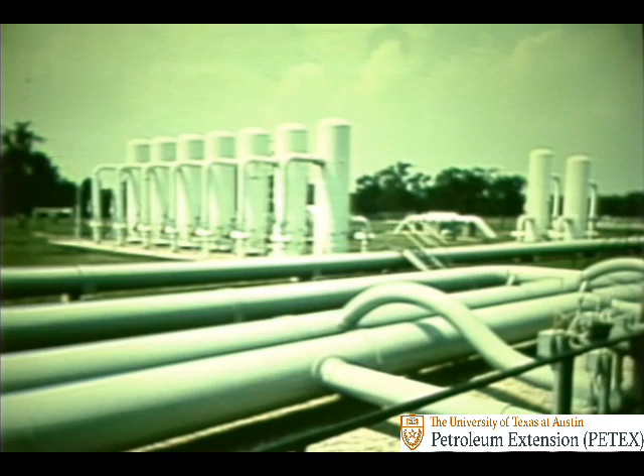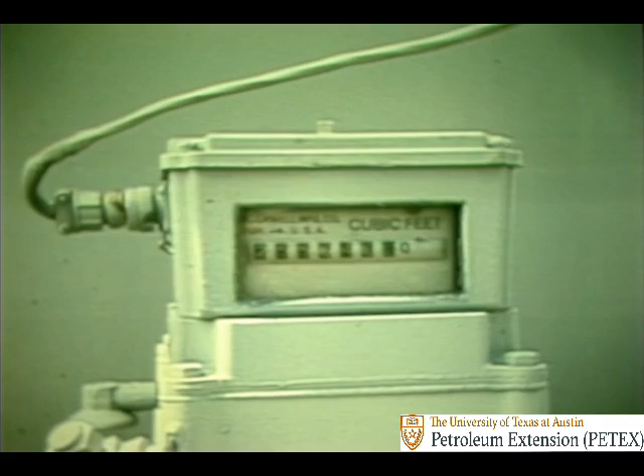Most gas meters record the volume of natural gas in cubic feet. But here another complication appears, because a cubic foot of gas may not always equal another cubic foot of gas. The real value of natural gas depends on the number of gas molecules contained in 1 cubic foot.

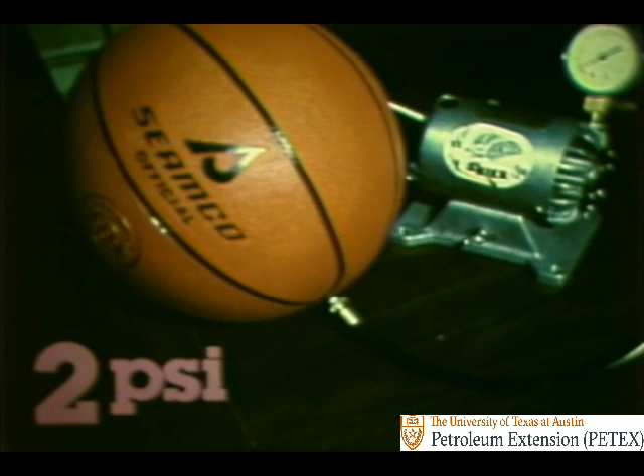Let's look at this principle in a slightly different situation. This basketball contains air at a pressure of 2 pounds per square inch. If we increase the pressure to 8 pounds per square inch by adding more air, we have squeezed more gas into the same space. We haven't increased the size of the ball, only the pressure, and thus the amount of gas it contains. So remember, the amount of gas in a confined space will vary with the pressure of that gas.

A gas meter measures only the number of cubic feet of gas that pass through it. The actual number of gas molecules will depend on the temperature and the pressure of the gas. Remember, the amount of gas in a confined space will vary with the temperature and pressure of the gas.

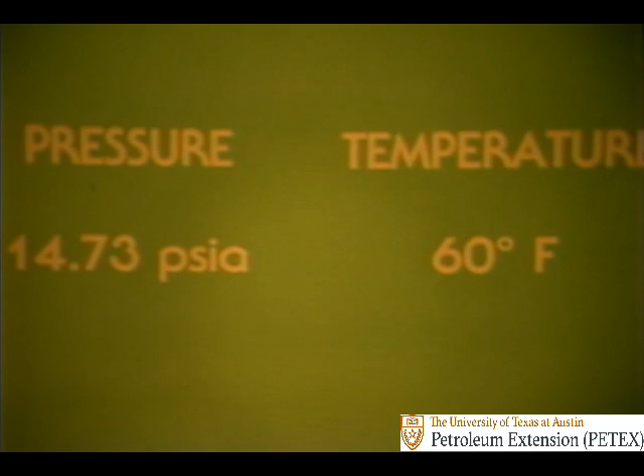Since gas temperatures and pressures do vary, most measurements are converted to a standard. In the United States, standard pressure is usually 14.73 psia, and standard temperature is 60 degrees Fahrenheit. All this may seem confusing now, but don't worry, you will receive additional training later. For now, just remember that to measure natural gas accurately, you need to know its flow rate in cubic feet, its temperature, and its pressure.

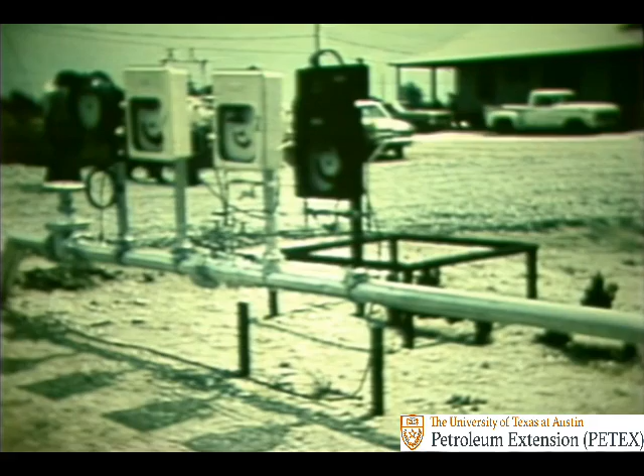Now, what does all this have to do with turbine meters? Well, a gas meter will measure the gas flow, or the amount of gas that passes through it. In addition, turbine meters use equipment to make temperature and pressure measurement automatically. This meter provides a readout in cubic feet of the amount of gas that has passed through it.

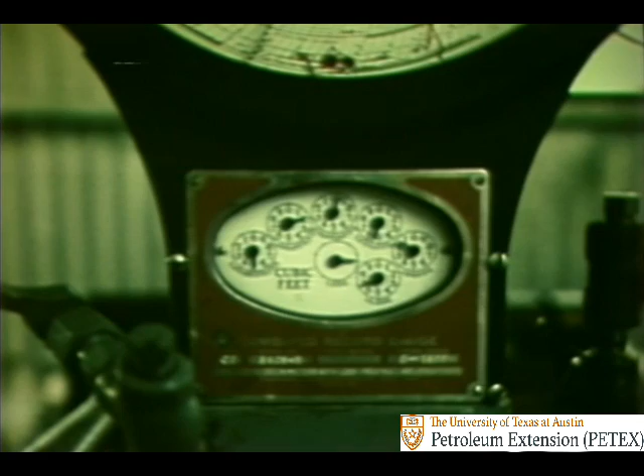Now, this example registers the amount of gas in cubic feet on a circular chart covering a 7-day period. The chart will provide a record of the amount of gas flowing through the meter for any specific time during the week.

A more sophisticated device measures the gas flow, time, pressure, and temperature all at one time. These figures can then be converted to a temperature and pressure standard.

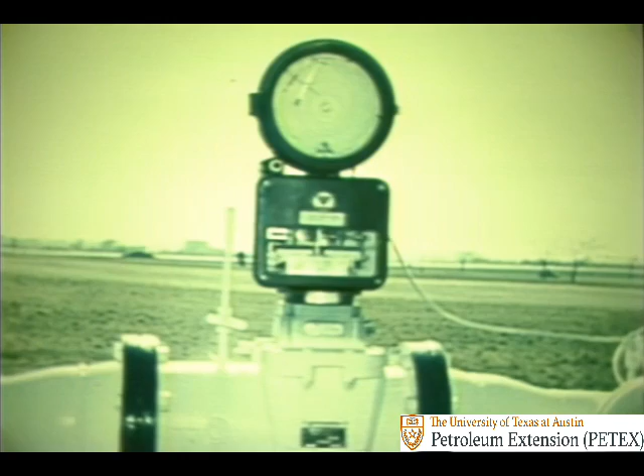The measurements from a meter in a remote location can be transmitted to a computer, which can do all the necessary calculations. And this computer can keep track of a number of meters at the same time.

As you can see, many types of meters are available to handle different situations. But no matter what type of meter is used, it is measuring a valuable product and must be inspected and maintained to ensure accuracy.

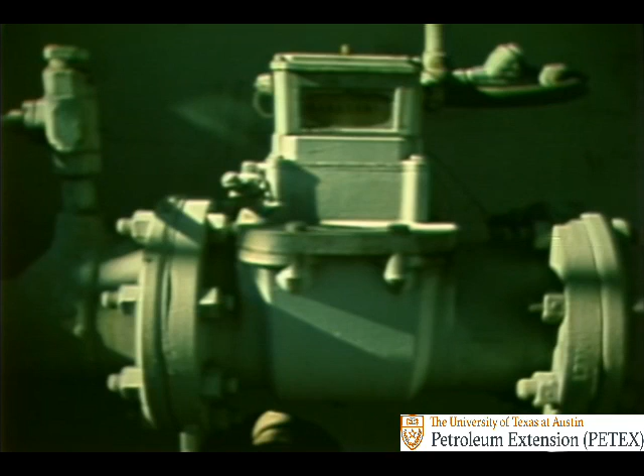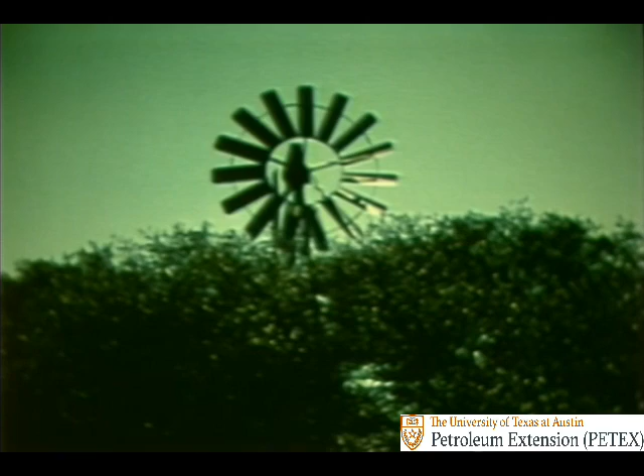Now let's turn our attention to how a turbine meter operates. Since it is a velocity type meter, it works somewhat like a windmill. A windmill consists of a number of blades on a rotor that turns as wind passes over the blades. The rotor turns faster as the wind increases in velocity. In fact, the rotor's speed will increase in direct proportion to the flow of air over the blades.

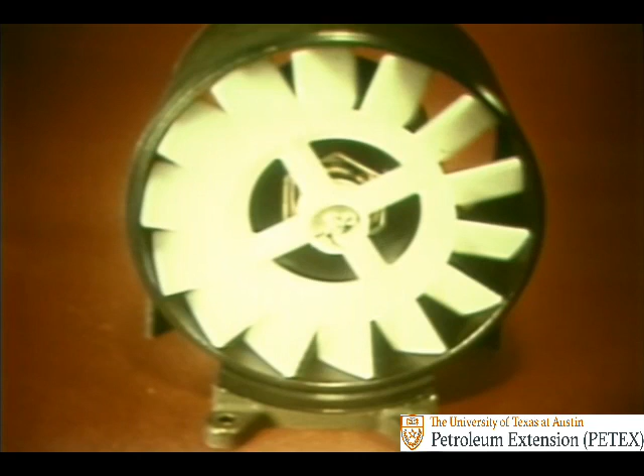Likewise, the rotor on a turbine meter has blades and turns in direct proportion to the force of the gas flowing over the blades. The faster the gas flow, the faster the rotor will turn.

If we increase the flow rate, more gas will move through the line, and the rotor will turn faster. If the flow rate slows down, the rotor will also slow down.

All gas meters are designed to work within a specific range. This is defined as the range of gas flow under constant pressure at which the meter will operate at a plus or minus 1% accuracy.

Say a meter has a range of 5 to 20 cubic feet per hour, or a 4-to-1 range. This means that any gas flow between 5 and 20 cubic feet per hour will be measured with the required plus or minus 1% accuracy.

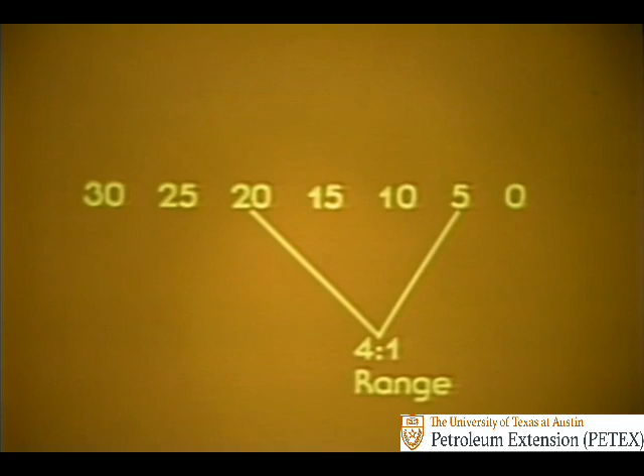If the flow rate is outside of the meter's range, it may not measure within the desired degree of accuracy. This is especially true at low flow rates.

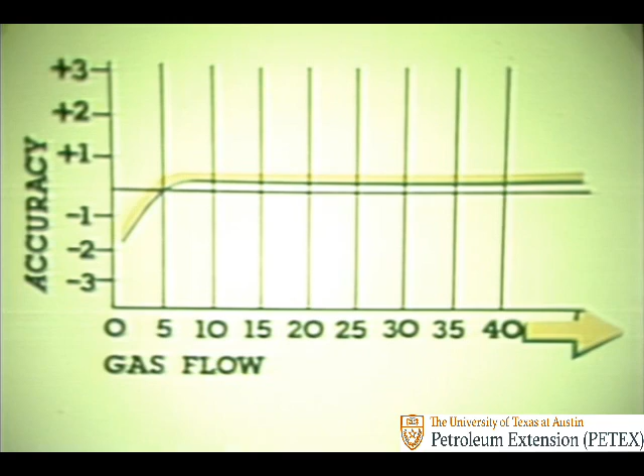If the gas flow is above the meter's range, the meter is operating over range. Not only could inaccurate measurements result, but the rotor bearings could be seriously damaged. If you suspect that the meter has operated over range, it should be given a thorough inspection.

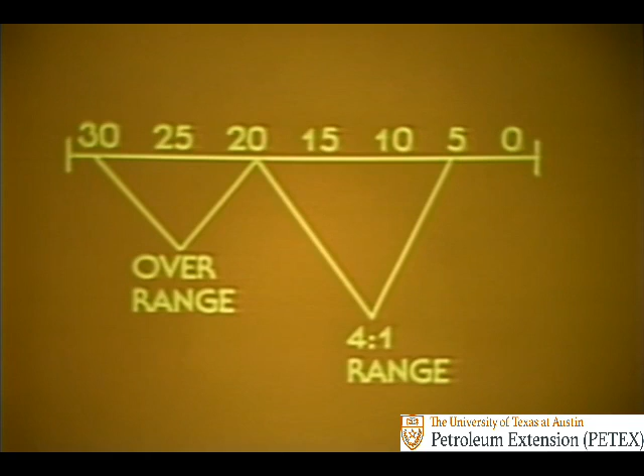One unique characteristic of a turbine meter is that its range will increase as the pressure of the gas flow increases.

Let's return to the revolving door model. As the gas flows through the meter, it turns the rotor, which registers on the recording device. If the pressure of the gas increases, more molecules are squeezed into the same space. Therefore, more molecules pass through the meter for each turn of the rotor. In effect, the meter is measuring a greater amount of gas, so its range has been increased.

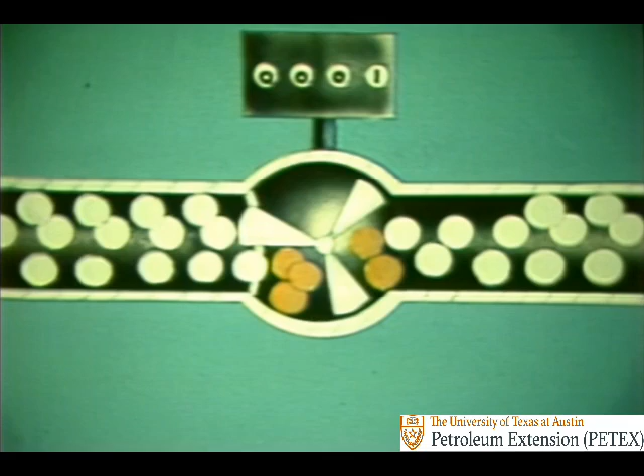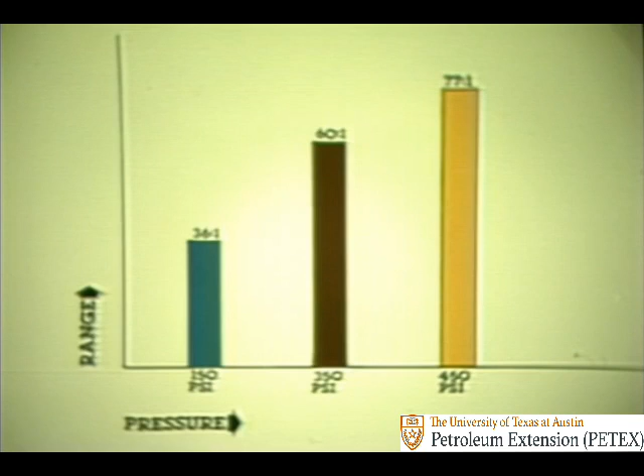The blue bar shows that the gas is at a pressure of 150 psi, and the meter's range is 36 to 1. In this situation, the meter will measure at plus or minus 1% accuracy any flow from over 233,000 cubic feet per hour down to about 6,000 cubic feet per hour.

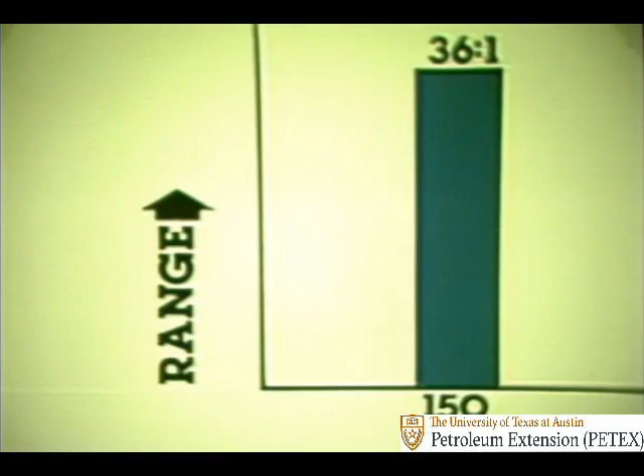If the company needed to send more gas, they could increase the pressure by squeezing more gas into the pipeline. Of course, any increase in the flowing pressure will also increase the flow rate of the gas.

Now, say the pressure is increased to 350 psi. A turbine meter would still measure accurately because its range would automatically increase to 60 to 1.

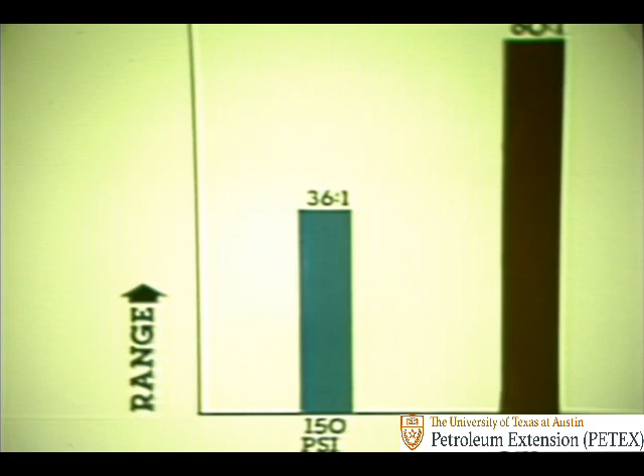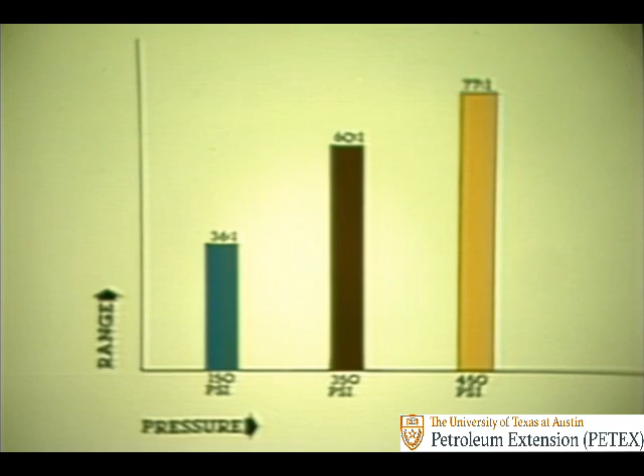Now, even if the pressure increases to 450 psi, the meter's range will increase to 77 to 1, and it would be able to measure flows of over 1 million cubic feet per hour. An orifice meter would require a number of different plates to cover this pressure range.

Before moving on to the parts of a turbine meter and how they work, let's review what we have covered so far. First, gas must be contained somehow, or it will dissipate into the atmosphere.

Second, the number of gas molecules in a cubic foot will vary with the pressure of the gas. If the gas is at a high pressure, more molecules will be squeezed into the area.

Also, as the temperature of the gas changes, it will affect the number of molecules. Gas at a low temperature will have more molecules per cubic foot than gas at a higher temperature.

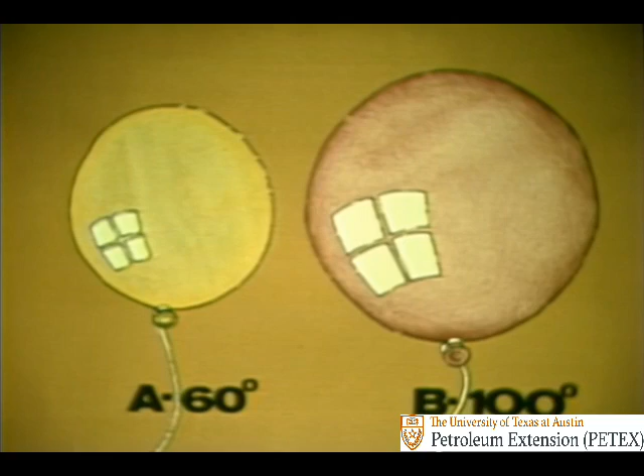Fourth, the turbine rotor will spin in direct proportion to the force of the gas flow. The faster the flow, the faster the rotor will spin.

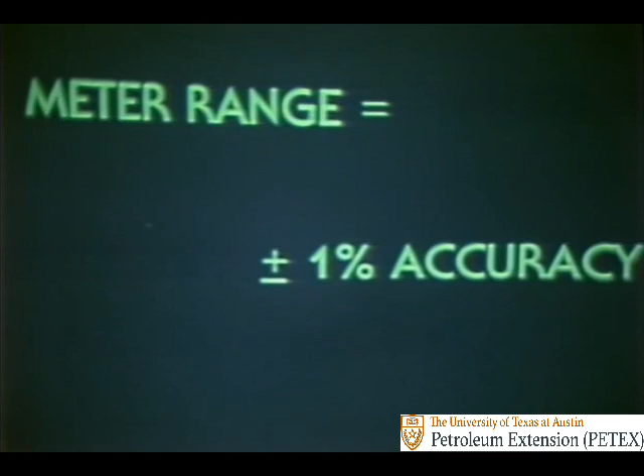And fifth, all meters have a specific range of accuracy. This is the range of gas flow under constant pressure that the meter will measure with plus or minus 1% accuracy. And finally, the turbine meter will automatically adjust its range to changes in gas pressure.

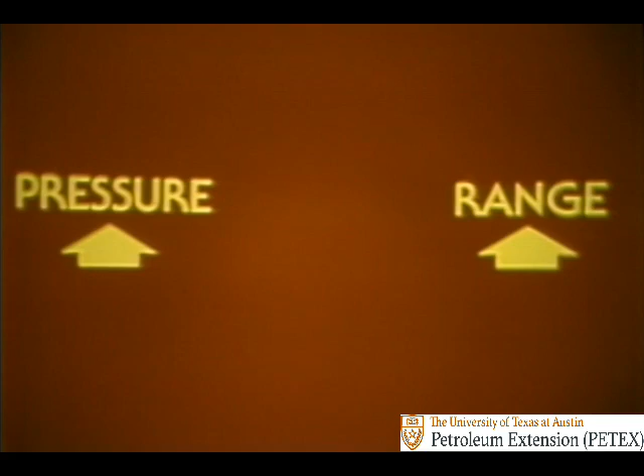So we have covered some general principles of gas flow and turbine meter operations. In part 2, we will examine the parts of a turbine meter and how it operates. But before continuing, please complete the review sheet for part 1.

Now that you have some background on the principles of gas flow and turbine meter operation, let's examine a meter installation.

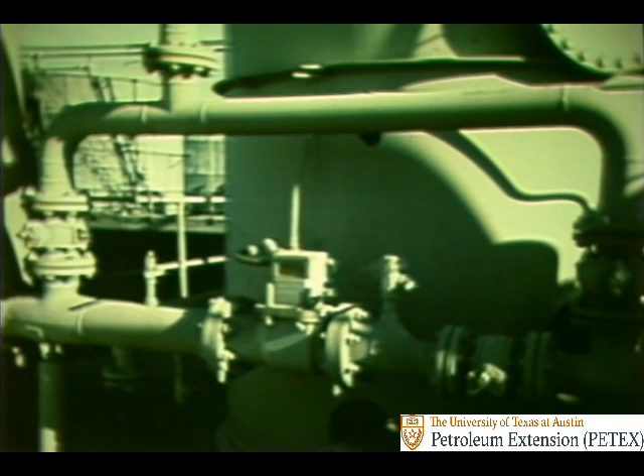Typically, the pipeline is divided into two sections, so the gas flow will not be interrupted when the meter is disconnected. The bypass line may or may not have a meter unit. If it doesn't, the flow will not be measured and will have to be estimated while the meter is inoperative.

In the piping, there may be a fitting that holds a strainer or filter. This strainer prevents dirt and trash from reaching the meter, since such deposits can damage or clog the rotor.

If the gas flow is turbulent, the pipeline will often contain straightening vanes. They eliminate swirling cross-currents and ensure that the gas flow is perpendicular to the rotor. Usually they are permanently installed and do not have to be removed for maintenance.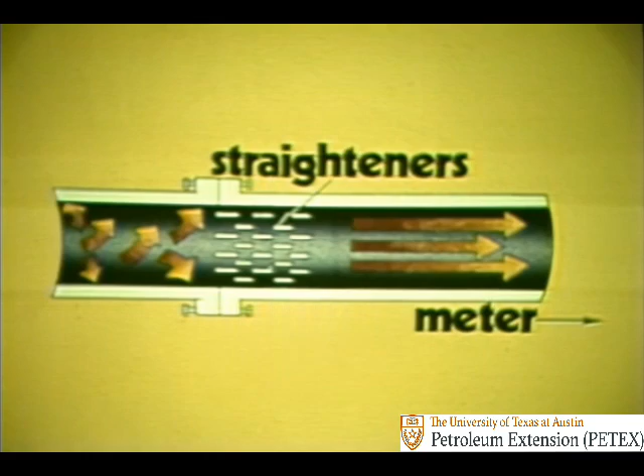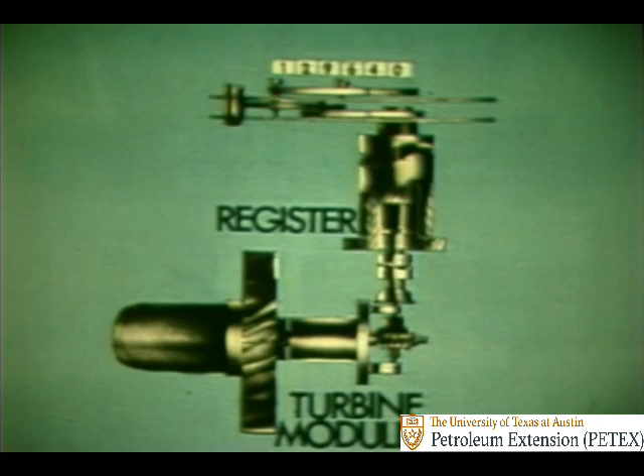That brings us to the turbine meter, which consists of two major parts, the register and the turbine modules. The register provides a readout of the gas flow. It is located above the pipeline and is not pressurized.

The turbine module consists of the rotor, the bearings, and in some cases, worm gears. Since the turbine module is sealed in the pipeline, it operates at the same pressure and temperature as the gas flow. In most models produced in the United States, the module can be serviced without removing the entire meter housing from the pipeline.

The gas enters the meter and strikes a diffuser, which forces the gas flow towards the outer blades of the rotor. This action increases the velocity of the gas and provides a more accurate measurement of low flow rates. The gas flows through the blades, turning the rotor like the wind turns the blades of a windmill.

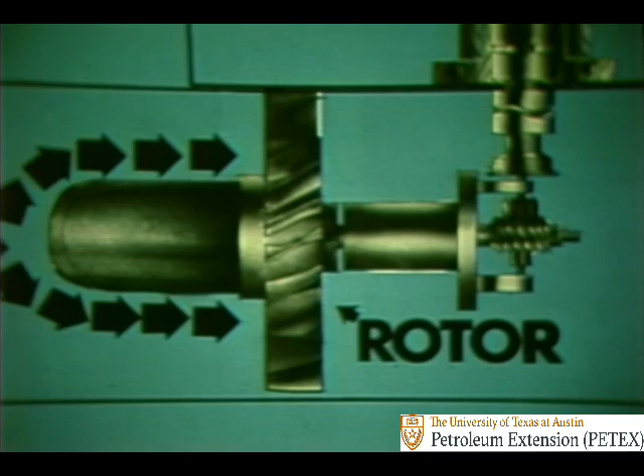Each manufacturer produces a slightly different style of rotor. Most are made of aluminum alloy or high-impact plastic. No two rotors can be made exactly alike, so each meter must be calibrated individually.

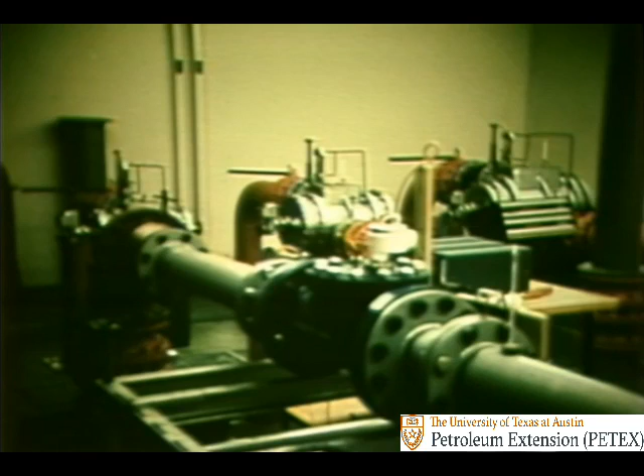If a new module is installed or the rotor is replaced in an existing module, the meter must be recalibrated against a known gas standard. In most cases, recalibration will be done in the shop or lab. Remember, if any major repairs or replacements are made to the rotor, the meter must be recalibrated.

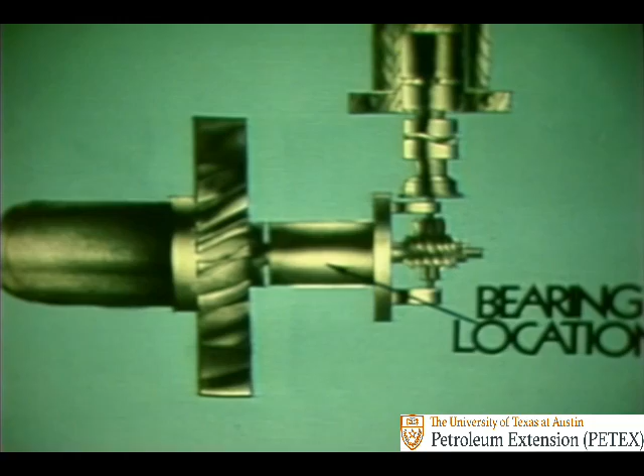The rotor may be supported by several different types of bearings, depending on the manufacturer's design. The bearings may be self-lubricating or may have to be lubricated on a regular schedule. You will have to know the manufacturer's instructions for each type of meter you inspect. Lubricating the bearings cannot be overemphasized, since it is a major cause of meter failure.

There are two methods of transferring the rotor movement out of the sealed pipeline. In the electromagnet design, the rotor movement is transformed into an electrical impulse by an electromagnet and a coil. This impulse is transmitted through the pressure-sealed module to the register.

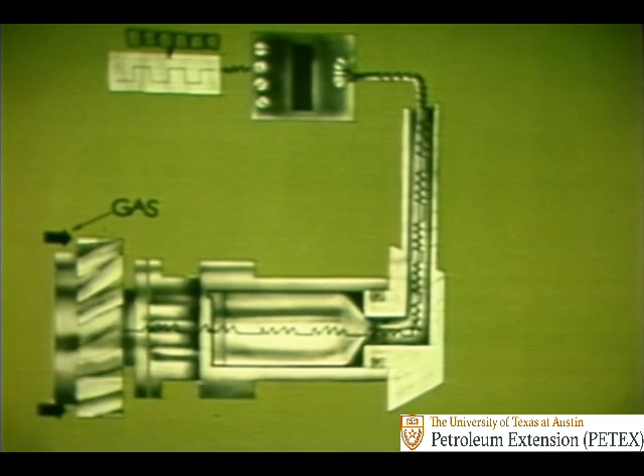Since the rotor movement is changed into an electrical impulse, it can be recorded on an electronic totalizer or computer adjacent to the turbine meter, or the impulse can be transmitted miles away to a central data location.

In the mechanical design, the rotor's motion is transmitted by a set of worm gears to a magnetic coupling. The magnetic coupling allows the rotor impulse to be transferred out of the sealed unit.

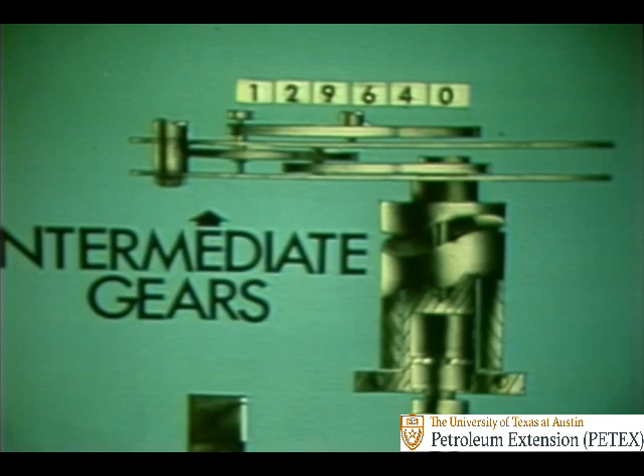The impulse passes to a series of intermediate gears that contain the change gears. If the temperature and pressure of the flowing gas is stable, a specific set of change gears can be installed. They will provide a readout in cubic feet adjusted to any desired standard.

Finally, the rotor's movement is recorded on the register. In this case, it is a digital readout. However, many different types are available.

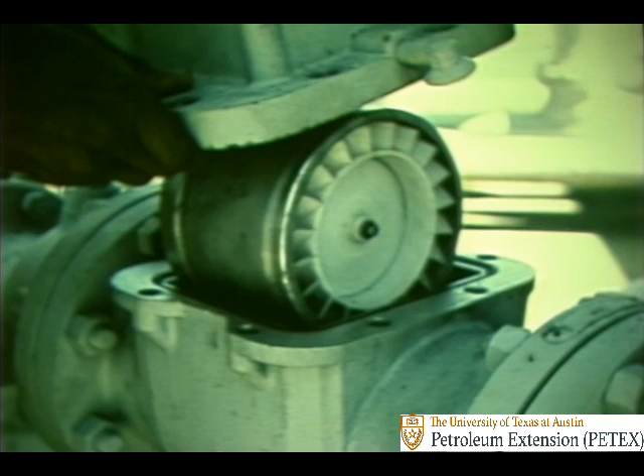The construction of a turbine meter is quite simple, since moving parts have been kept to a minimum. Although it is uncomplicated, it is a very specialized piece of equipment and should be kept clean and free of damage.

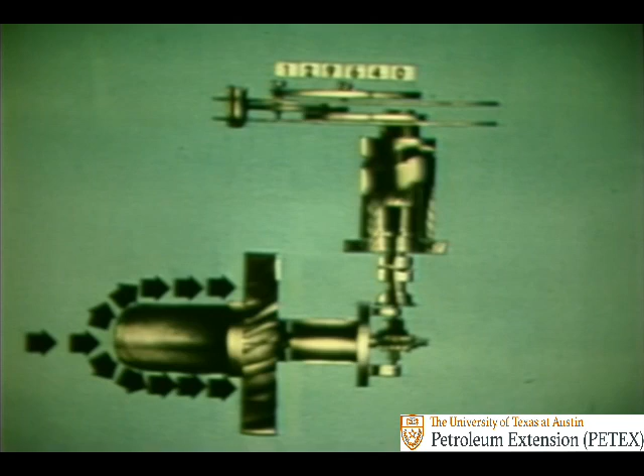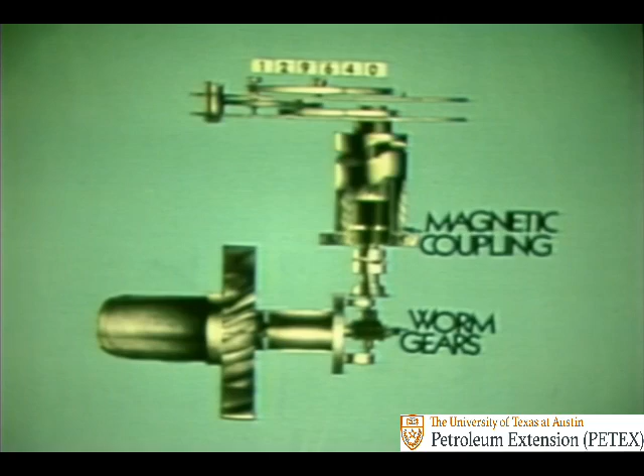Remember, the basic parts of a turbine meter are the diffuser, the rotor, and the bearings. These are followed on the mechanical design meter by the worm gears and the magnetic coupling, the intermediate gears that contain the change gears, and finally, the register.

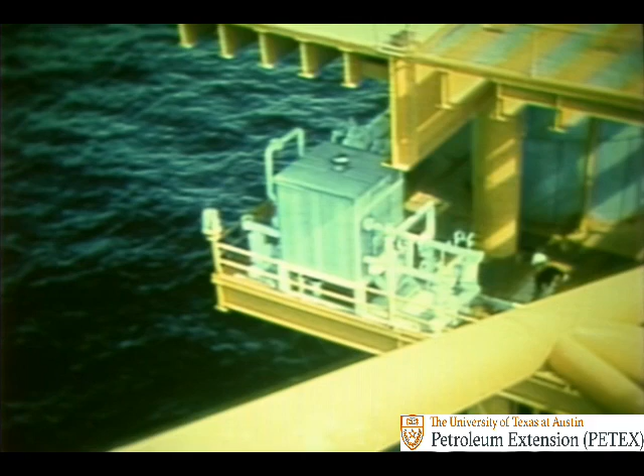The amount of time between meter inspections usually will be determined by how the individual meter is used. Meters measuring clean, dry gas will usually need less maintenance than those monitoring unprocessed production gas. Hydrocarbon liquids can wash out lubricating oil in the bearings.

Slugs of liquids or hydrates can damage and completely clog the rotor. Brands and types of turbine meters will differ slightly, but in general, the field inspection should consist of 6 main procedures. They are: 1. Disassembling the meter. 2. Performing a preliminary spin test. 3. Visually inspecting the meter and its components. 4. Lubricating the bearing if necessary. 5. Performing a final spin test. And 6. Reassembling the meter.

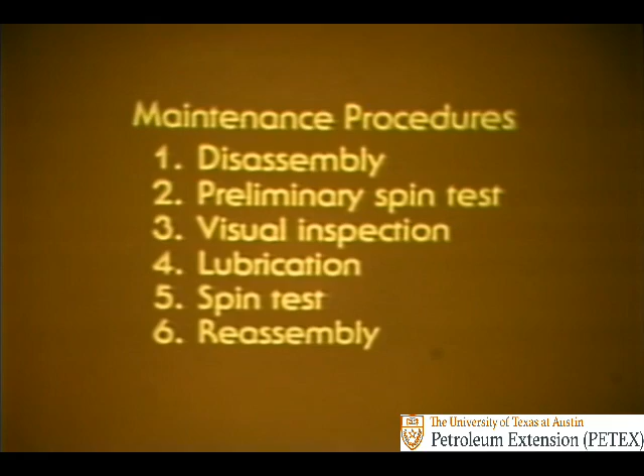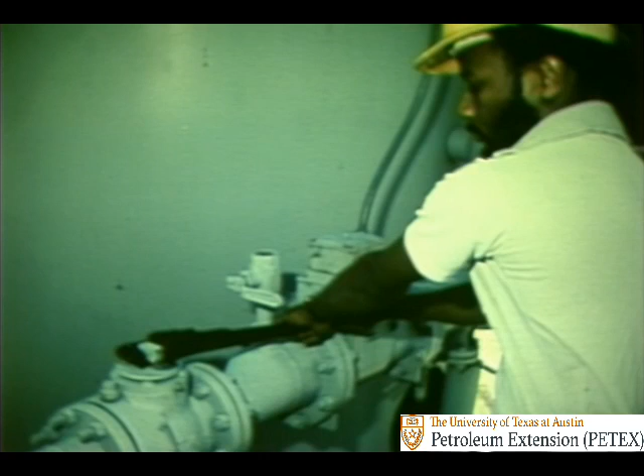Meters are found in many different locations, so be sure to familiarize yourself with the layout before beginning any work. After surveying the location, shut down the line on which you will be working by closing the proper valves. A bypass line allows a continuous gas flow so that there will be no interruptions while you are dismantling the meter.

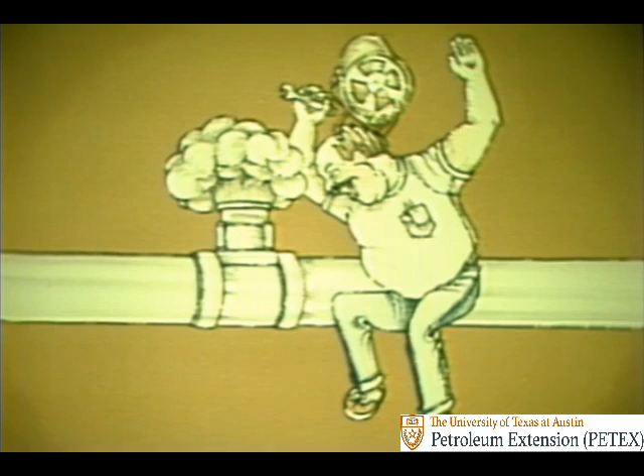You will find the rotor module enclosed in the line and at the same pressure as the gas flow, which can be extremely high. So be sure to bleed the line after you close the valves, or you might get a dangerous surprise when you unbolt the meter housing.

This particular meter sends an electrical impulse to a central receiving station. After removing the top plate, check the connections and test the circuit with a voltmeter to ensure that the current is off. Then remove the register from the meter and inspect all parts for damage or wear.

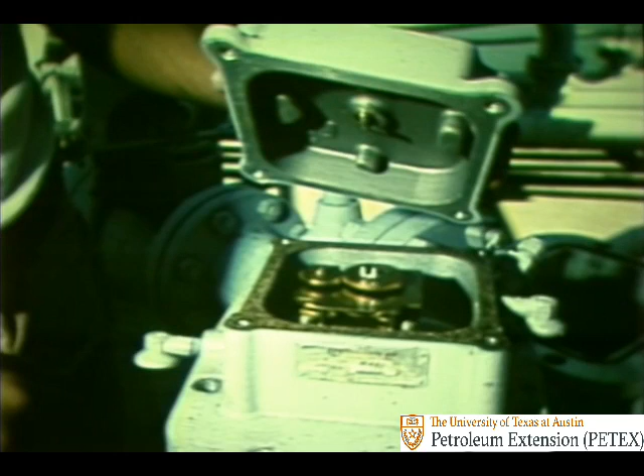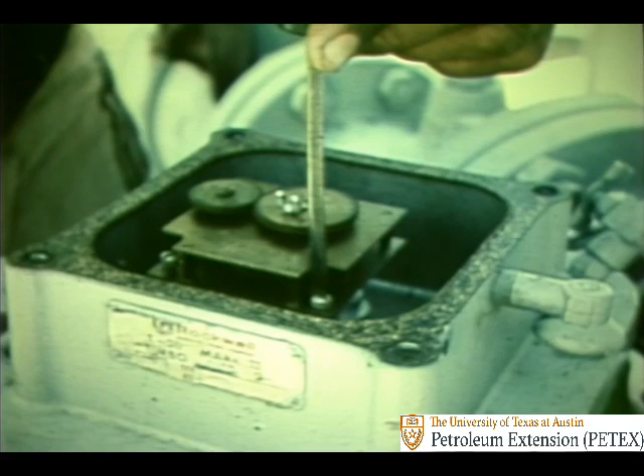Next, remove the bolts holding the cover on the coupling and the change gears. Lift the plate off and examine the housing for dirt, liquid, and damaged gears. Carefully unscrew the change gears and inspect them for worn or broken teeth.

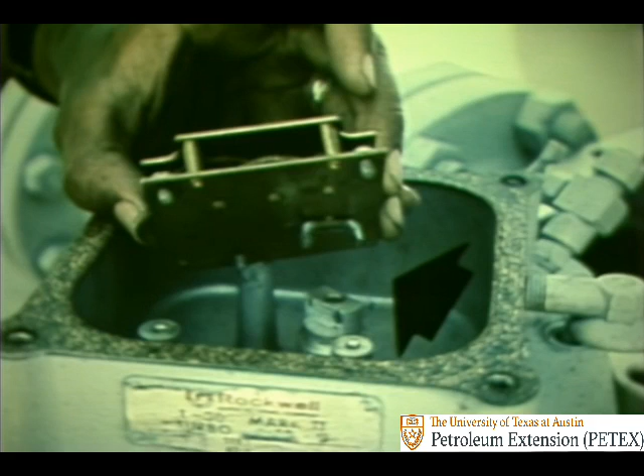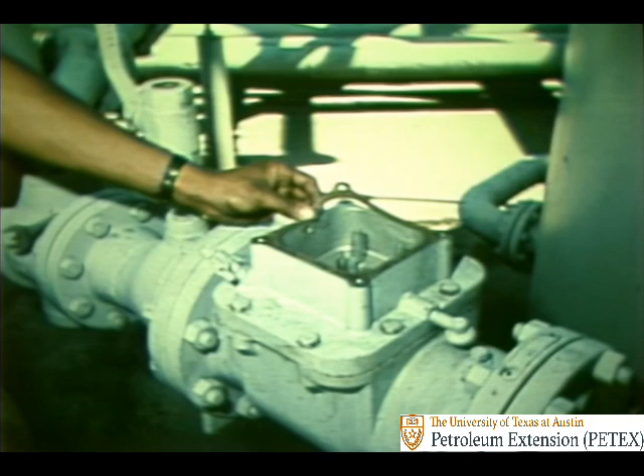The arrow is pointing to the magnetic coupling and the flange on the change gears. When the gears are in place, the coupling turns the flange, which drives the change gears. Next, carefully remove the top of the magnetic coupling. This will uncover the pin that drives the coupling. Check both the pin and the fitting. Finally, examine the gasket around the change gear housing. If everything is okay, reassemble the housing.

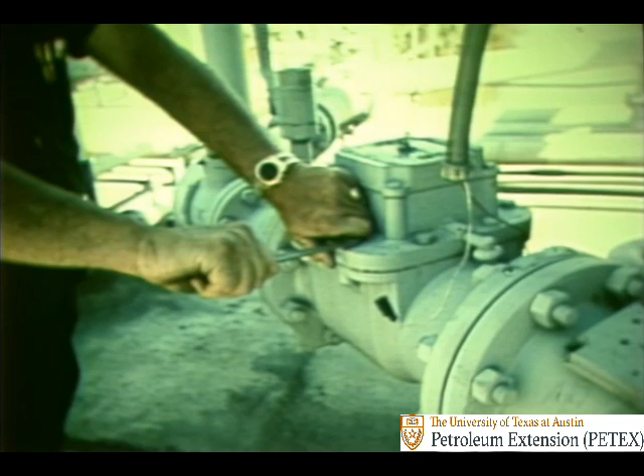After you are sure that the gas flow is off and the pressure in the line has been released, begin to unbolt the meter's top plate from the meter housing. When the meter's top plate is free, very carefully lift the rotor module out of the line. If the module is a large one, lifting it may require 2 people.

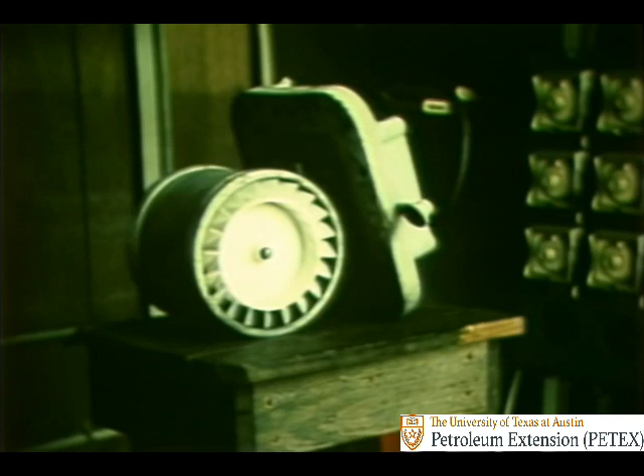It is very important that the rotor is not bumped or damaged in any way, or the entire module may have to be replaced. The top plate with the module should be placed on a stand in an area that is not affected by the wind, since even a slight draft will be enough to affect the test results. Next, carefully inspect the lining and fitting for dirt, nicks, or anything else that might damage the rotor blades.

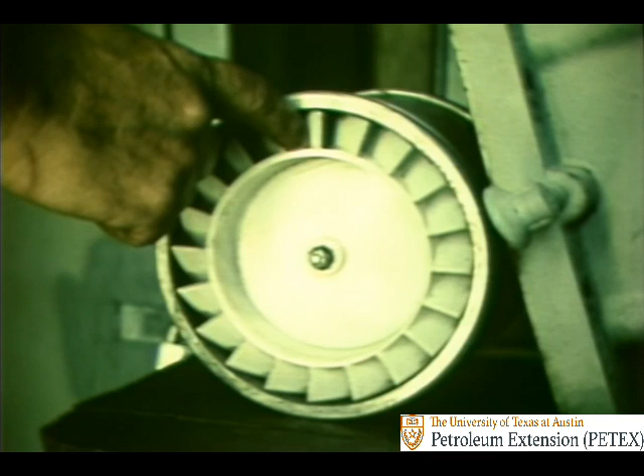Then perform a preliminary spin test on the rotor. This test will provide an indication of the bearing condition and the meter's accuracy. First, inspect the rotor blades for damage. Then, while holding an accurate watch, place your finger on the rotor and spin it quickly.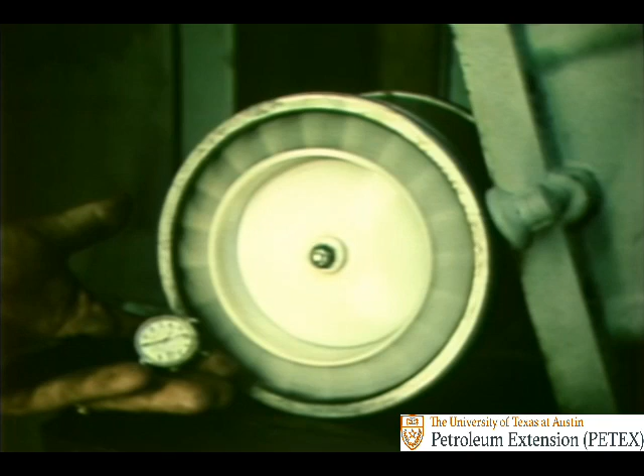Note the exact second that you start to spin the rotor. Next, calculate the amount of time it takes the rotor to come to a complete stop. Compare the result to the average standard spin time for that specific meter. This standard is provided by the meter company, or your company may have determined it when the meter was initially installed. If the spin test is significantly shorter, say 3 or 4 seconds, it indicates an increase in friction resulting in inaccurate readings at low flow rates.

Inaccurate readings may be caused by a lack of lubrication, bearing wear, or some other problem. Your company's policy may specify making field repairs, taking the rotor module into the shop, or simply replacing it with a new module. Be sure you know what to do if a spin test is below normal.

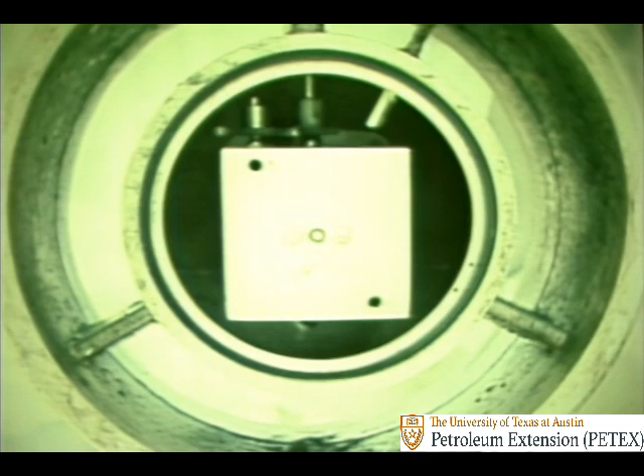After the preliminary spin test has been completed, examine the gear assembly for worn or missing teeth. The assembly is usually located directly behind the rotor. Then lubricate the gearing according to the manufacturer's or your company's instructions.

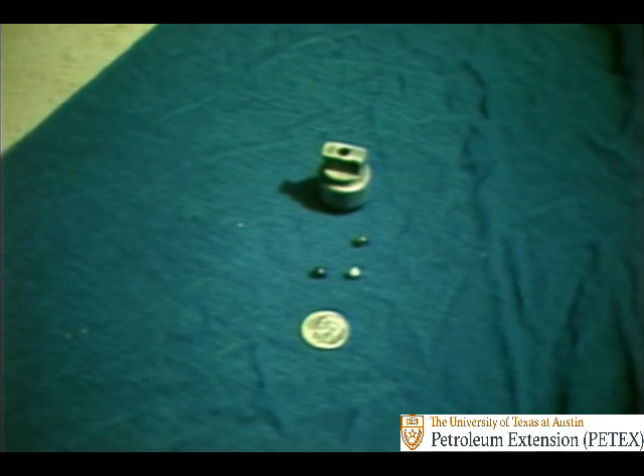Throughout the entire procedure, it is essential that you be very careful, since some of the parts are very small and can easily be dropped or mislaid. Take your time.

After completing all inspections, lubrications, and repairs, a final spin test should be conducted. Lubricating the bearings will often affect the results of this test, so be sure to lube first.

The final test is performed the same way as the preliminary one, but it should be repeated 3 times and the average spin time compared to the established standard for that individual meter. Be sure you know what your company's policy is concerning a meter that does not come up to the standard.

Before reinstalling the module into the body, examine the body gasket and repair or replace it if necessary. Finally, reinstall the module into the line. Remember, the spin test should be the last step before reassembling the meter.

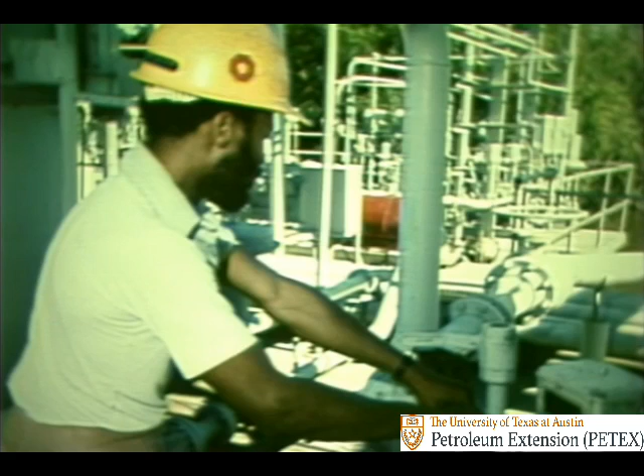Open the valve very slowly when pressuring up the meter. It is important that you take special precautions during this step. If the pressure increases too fast, the rotor may overspeed and be permanently damaged. Have all the necessary tools available and know what you are going to do before you start.

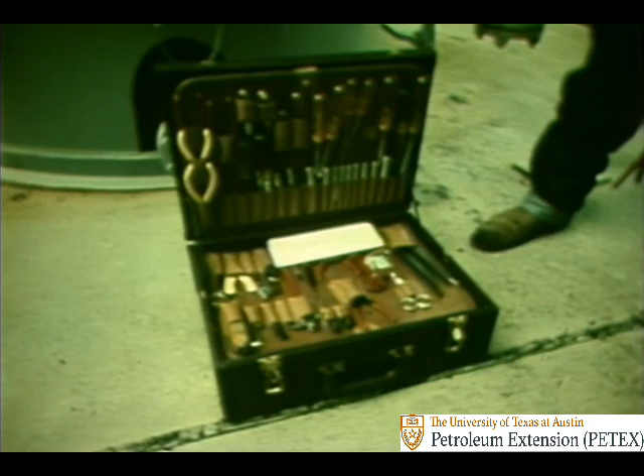The basic procedures for testing a turbine meter are the same even if the meter is in a different type of location. First, familiarize yourself with the layout. This installation has 2 parallel lines, each having a meter.

The gas flow is diverted through one line, while the second line is shut down for inspection. During normal operations, both lines would be open. Close the valves and relieve the pressure in the line.

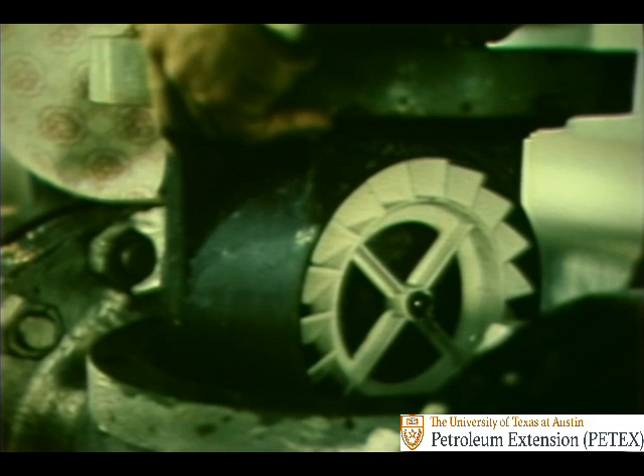This is a large meter. You'll find it is more convenient to remove it from the line in one piece. A special stand is used to hold the meter while the inspection is performed.

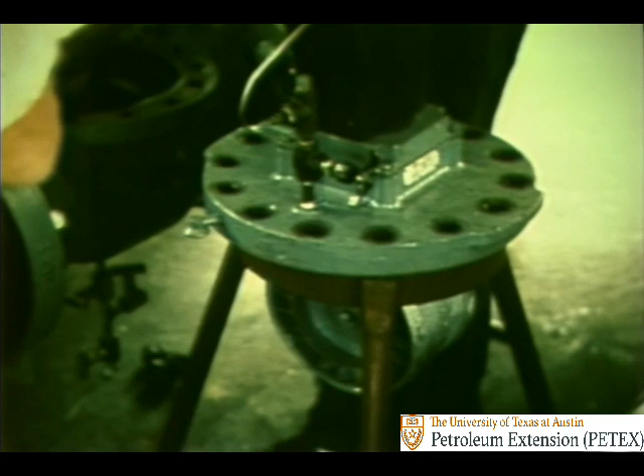Some companies will prefer that the preliminary spin test be conducted before the gearing is removed. If the spin time is below the standard, it may be due to worn bearings or a problem in the gear train. You can isolate the cause by doing a spin test after you remove each major part of the unit until the spin time comes up to the standard.

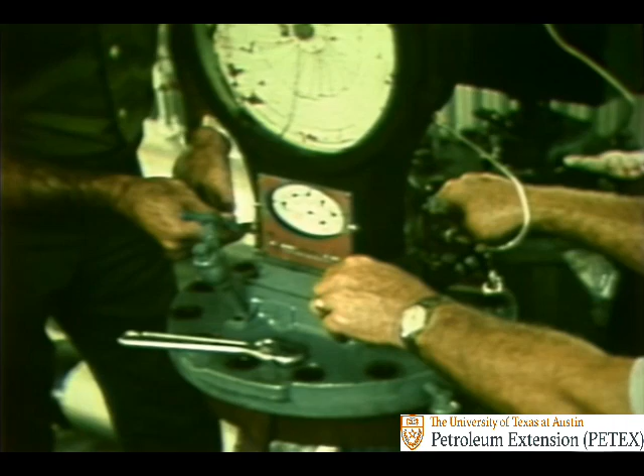For this example, let's assume the spin time was slow. Remove the register and perform another spin test. If the spin time is still slow, remove and inspect the intermediate gears and conduct another spin test. Continue this procedure until you have isolated the problem.

After you have located and repaired the problem, continue the inspection of the bearings and worm gears. Don't forget to lubricate them according to the manufacturer's instructions.

Finally, perform the final spin test and record the spin time. Remember to use the average from 3 spins as the test result. If the spin time corresponds to the standard for that meter, reassemble the meter.

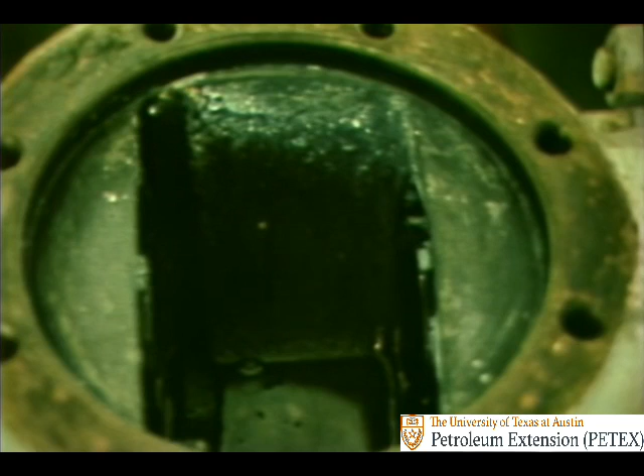Always check the meter housing for dirt or liquid and replace the gasket if it is damaged. Reinstall the module into the body and pressure up the meter run very slowly to avoid damage to the rotor.

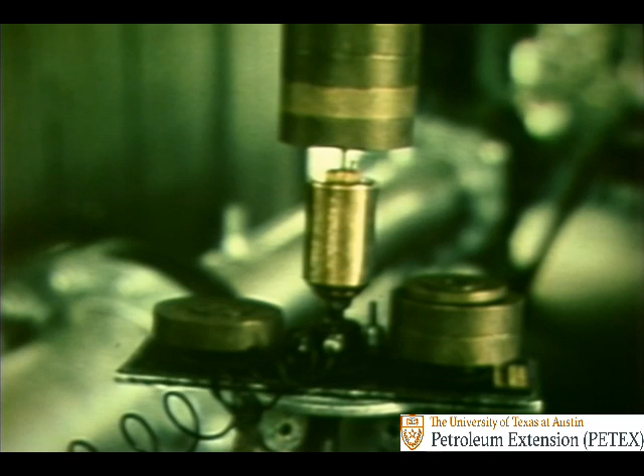In some cases, there will be other equipment that will have to be inspected at the same location. This is a portable pressure tester. Its readings are compared to the regular pressure readouts to make sure that the instrument is operating accurately.

Also, a special connection may be in the pipeline for inserting a thermometer. This provides a check of the accuracy of the temperature recorder. If any special tests are to be conducted on the location, be sure you know what and how before you leave for the job. Take all the necessary tools and specialized equipment you may need.

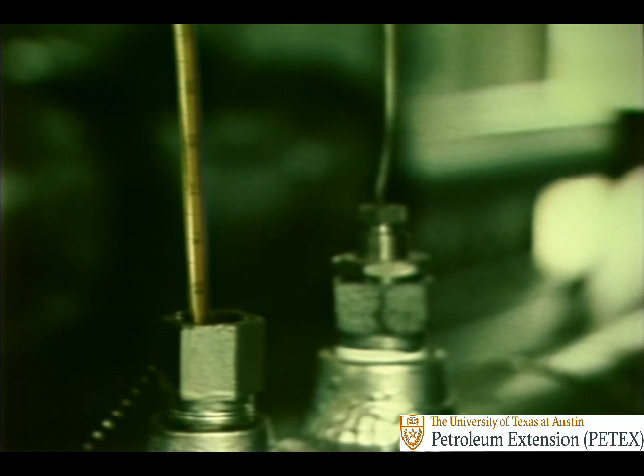Congratulations! Now you have a general background in turbine meters. You will continue training on the specific types of meters, equipment, and locations at which you will be working. But before you feel too confident, complete the review questions for Section 3.